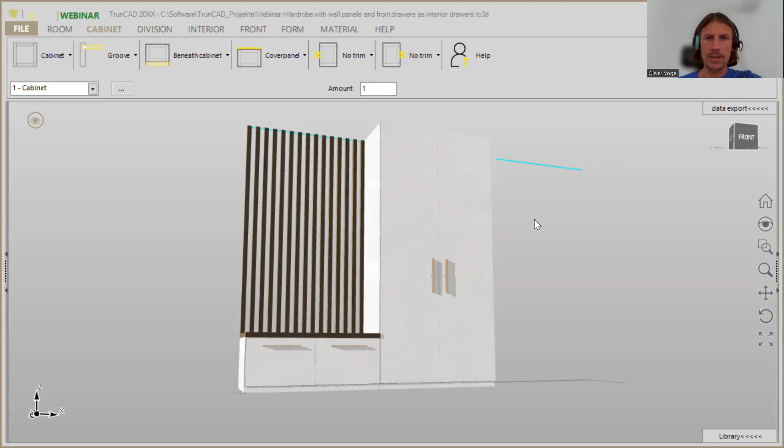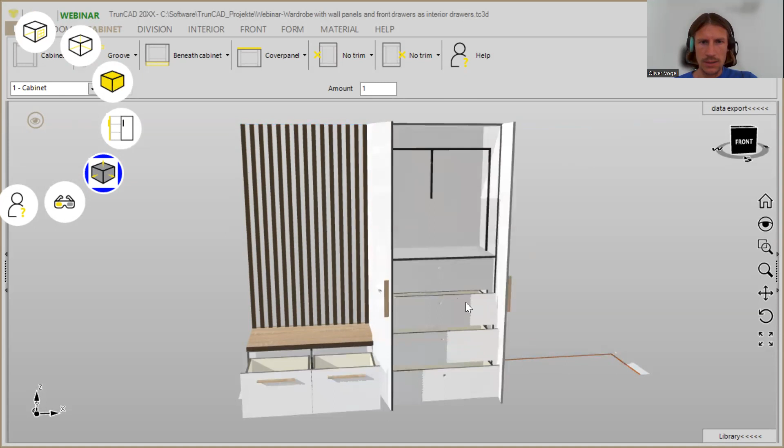Today you're going to see how we plan a wardrobe with wall panels and front drawers used as interior drawers, step by step. When I click here on the eye and open the doors, you can see that we have front drawers used as interior drawers. I will also show you what to consider and how to plan this in TrunCAD.

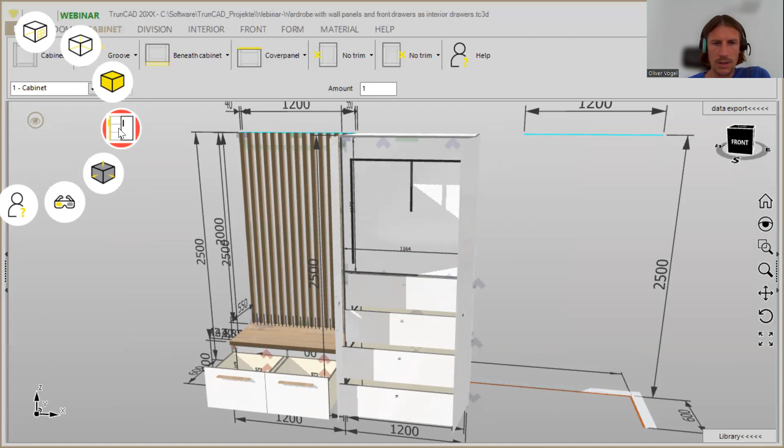All right, let's start. First of all, I will activate the smart clicks and make the doors visible, and when we click here again, they will be closed again.

So if there are any questions, just let me know in the chat, and let's start a new project. We click here on the File tab and create a new project.

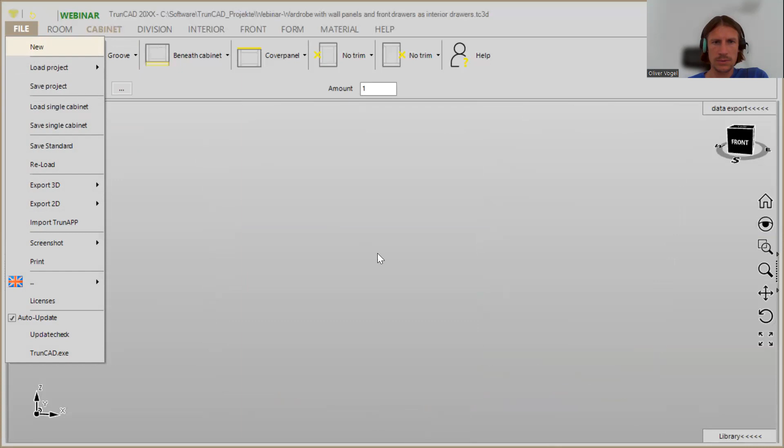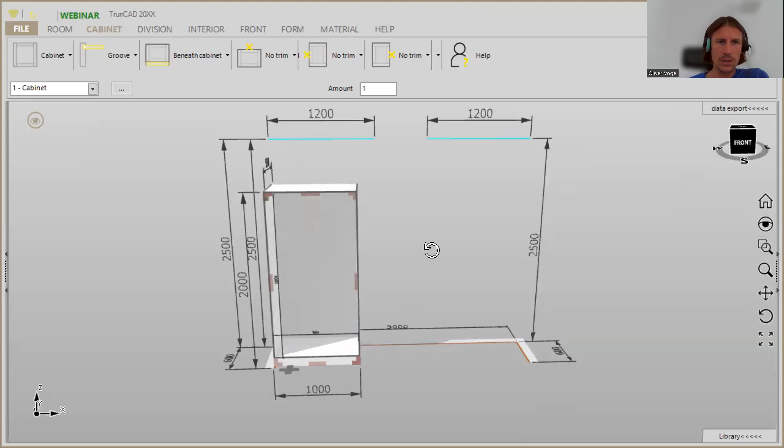So we start with a room. We can make this left side and right side a bit smaller. It's not so significant in this project. Here we change the height to 500, and here the width of our cabinet to 1200.

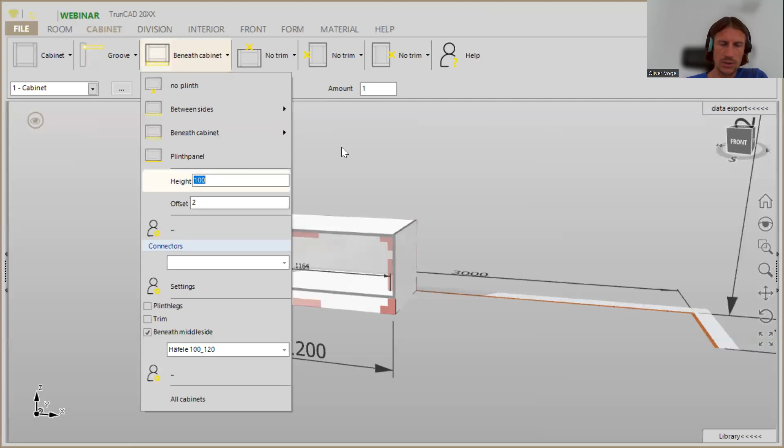So we click here on beneath cabinet and change the height to 80 millimeters. And we do have a cover panel on top, so we just activate it and we will have an overlap of 3 mil.

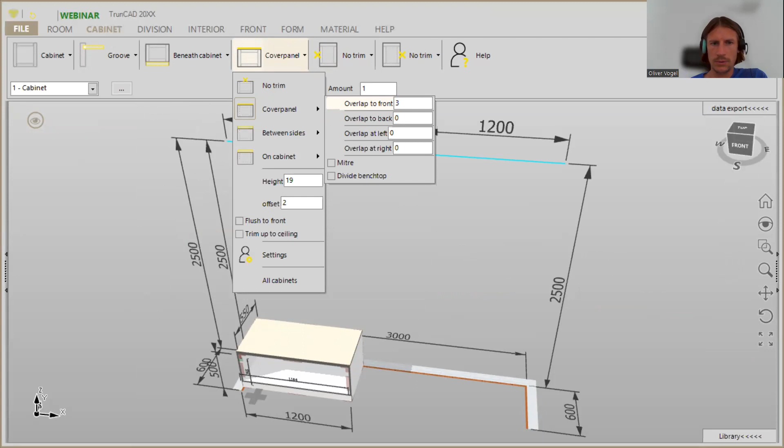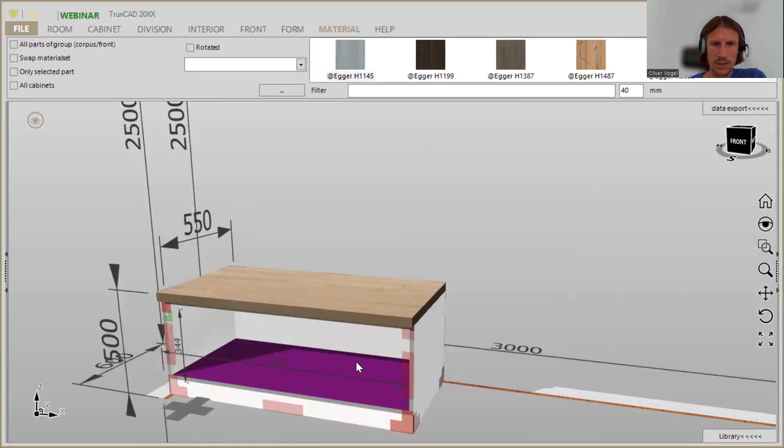Next we can go to the material tab and drag and drop a new material onto it, which is 40 millimeters thick, and then it's adapting.

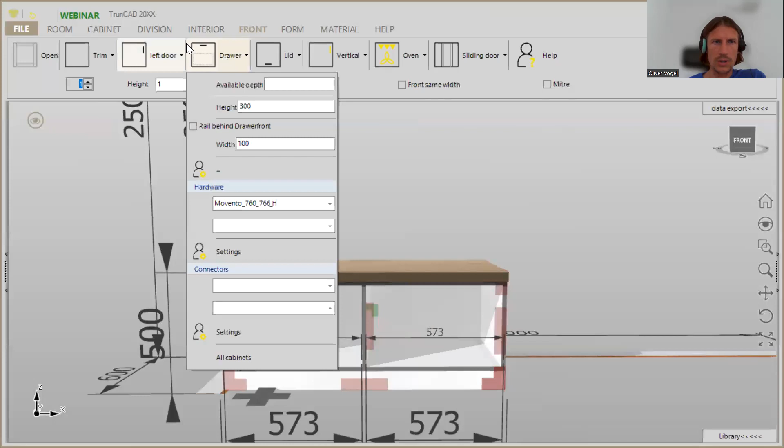All right, the next step is we click on the division tab and add a vertical, and then we click on the front tab and add two drawers, one on the left side and one on the other side.

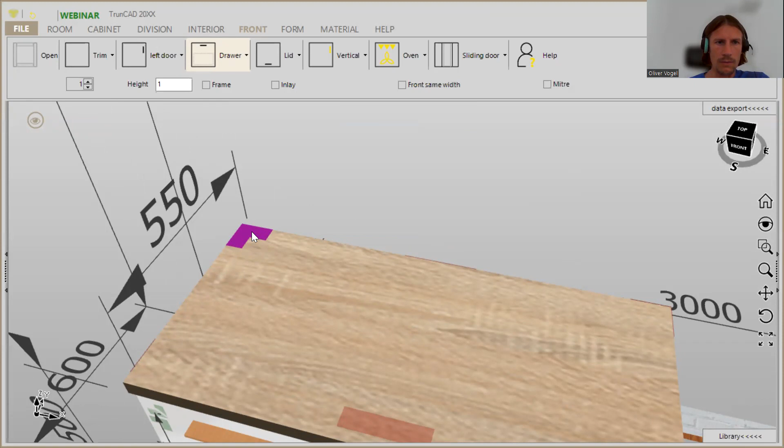So that is our first cabinet, and for the next one we want to have a cabinet on top of here, which will be our wall paneling. So we can click here and just add a new cabinet.

So that is our default cabinet. Now we want to have it here the same width as our bottom cabinet, and the height is okay.

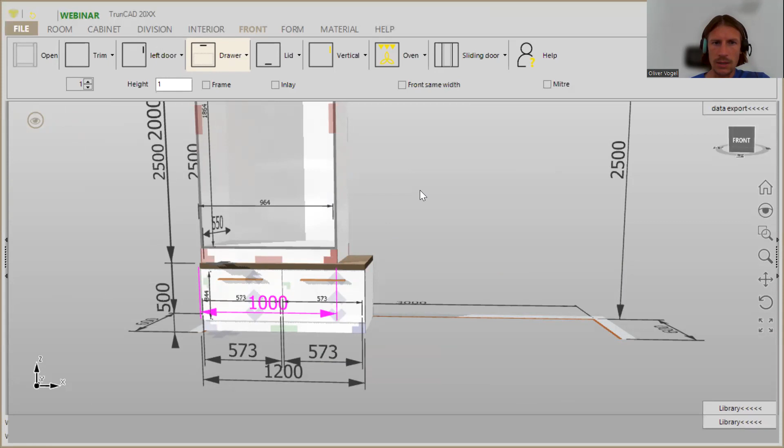And in this case, we are going back to the cabinet tab. We don't want to have a back, so we type in no back. And we don't want to have a plinth, that's why we click here on no plinth. Everything in the cabinet tab.

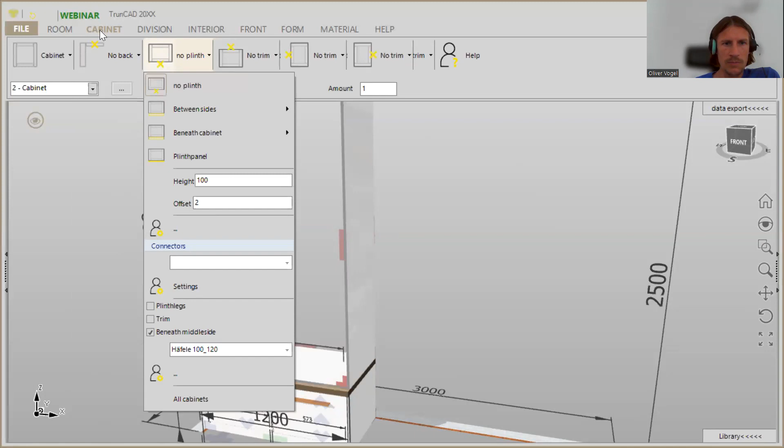So we will delete the top panel. Just click on the smart click and here we delete the top panel. And the same with the bottom panel - we click on the smart click and we will delete the bottom panel.

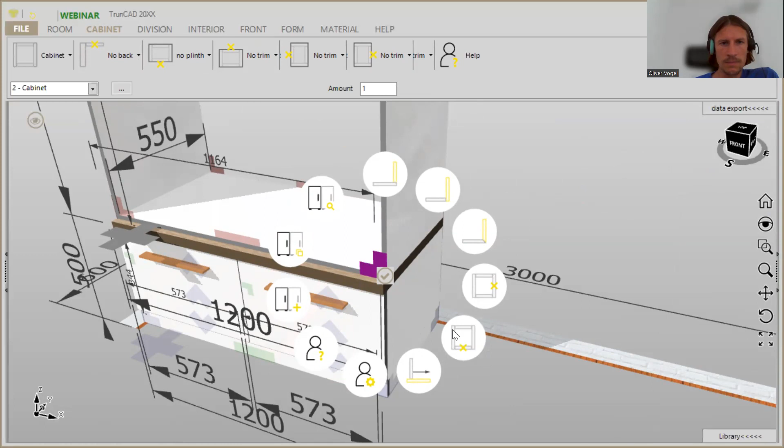Next step is we go here to the division tab, and here we can calculate how many verticals we want to have. Now when we have the sides 15 or 13 plus 2, we have 15.

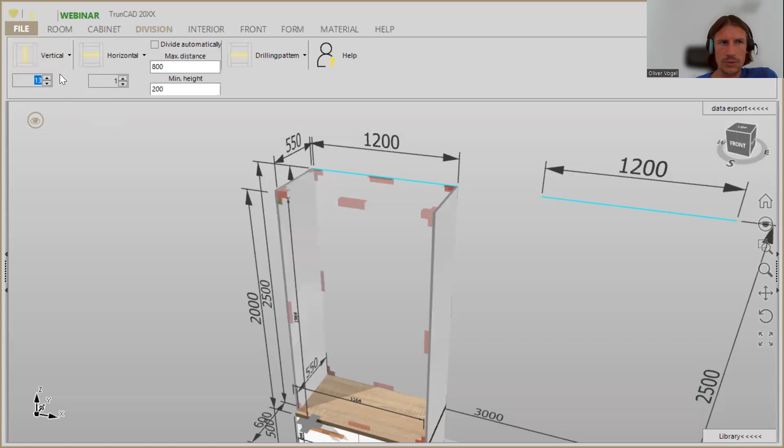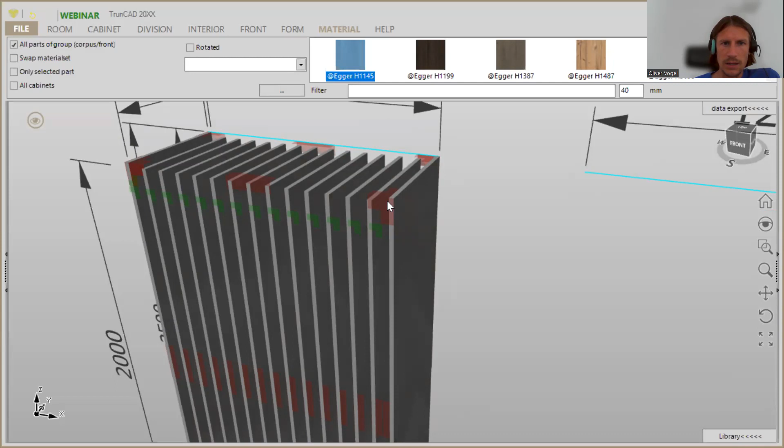We can drag and drop it in here, so we can also change the thickness. Now therefore we go to the Material tab, activate the checkbox 'all parts of a group', and then we just drag it and drop it over it, and the panels are getting thicker and the space in between is getting less.

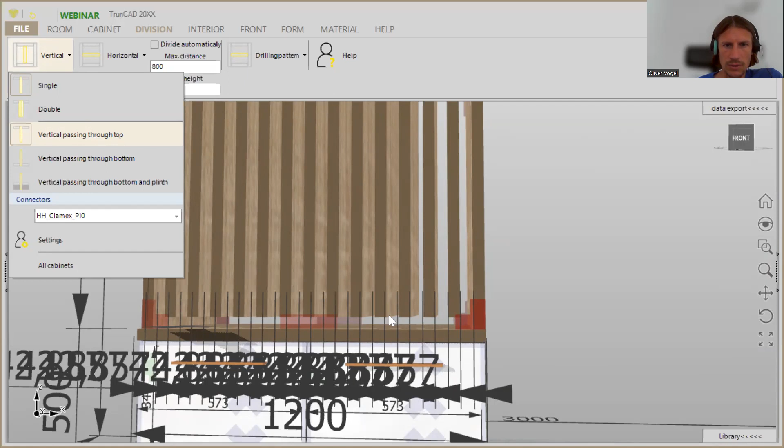So you see here the panelings don't go to the top, neither to the bottom. That's why we go back to the division tab and go to the menu of verticals, and we say vertical passing through top and through bottom. Then you will see they are also going to the bottom. Yeah, now they are going to the bottom.

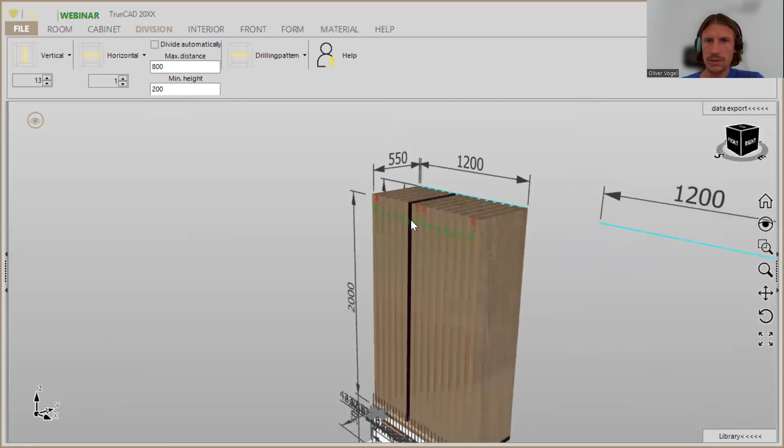So I click this button again. So, last but not least, we don't want to have such thick panels. That's why we click here on the depth of the cabinet and say we just want to have 40 millimeters, and then our panels have 40 millimeter thickness. Here you can also change it to 18 or whatever you want.

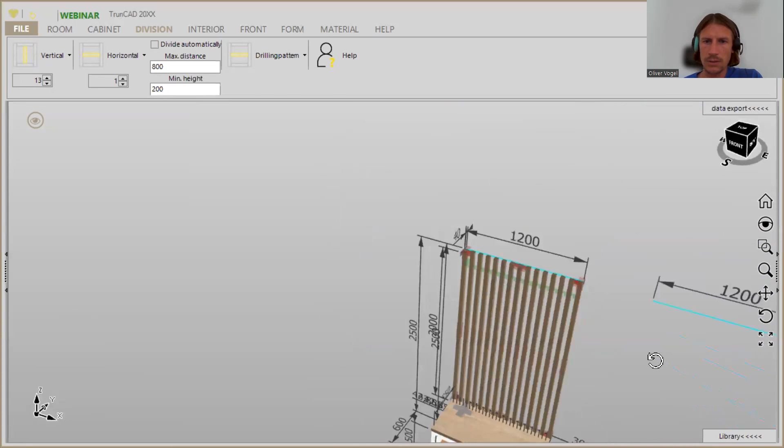So yeah, that is actually our second cabinet. And last but not least, we add our last cabinet. I just click here on the smart click, and here the width is also 1200 and height is 2500.

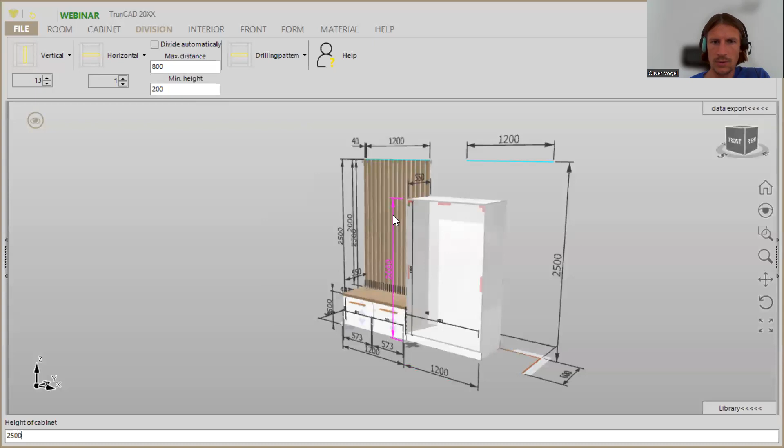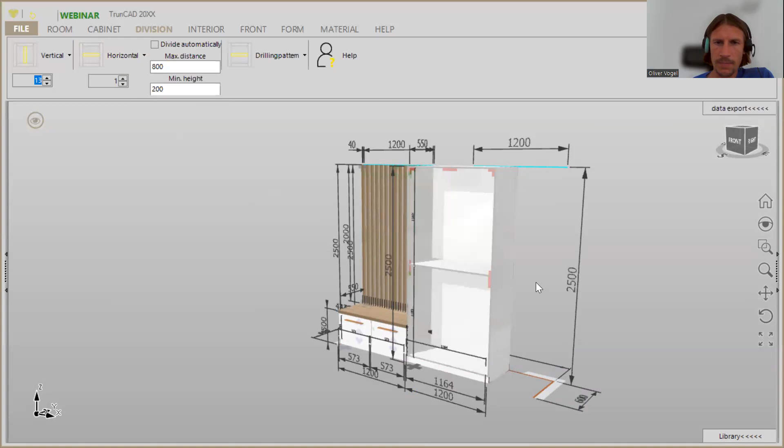So we are going to the cabinet tab. Beneath cabinet, we have also here a height of 80 millimeter. And then we are going on the division tab. We add here a horizontal, and here we add 2 verticals.

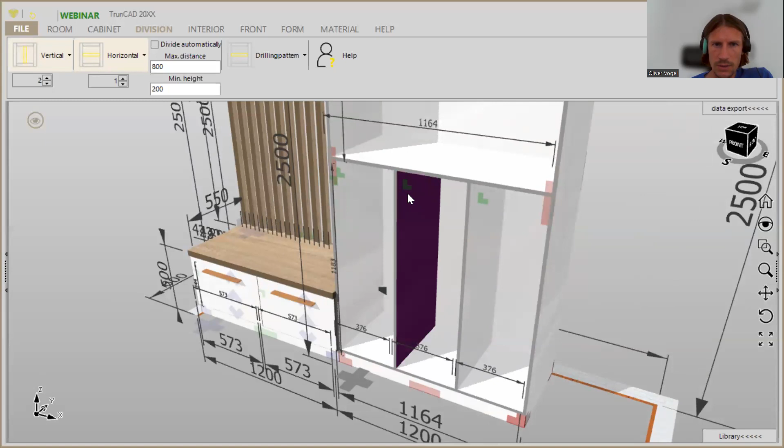Now I show you how to make actually interior drawers with front drawers. First of all, you see we have here 3 areas, and here the whole area, which is purple colored. Now the areas are getting purple colored when we are on a smart click. We click on here, and here you can say, okay,

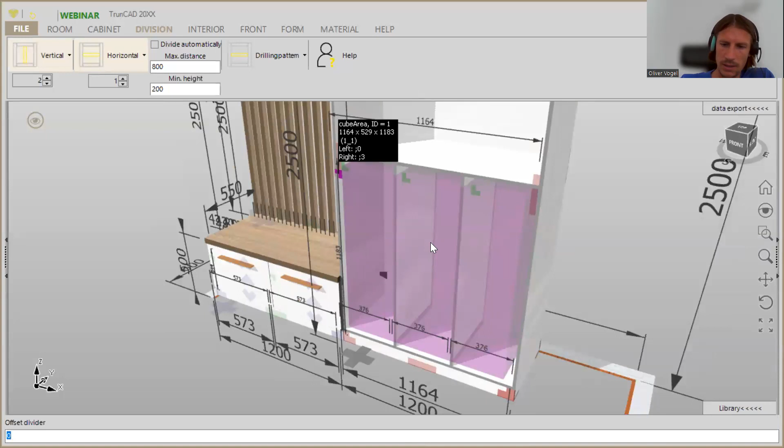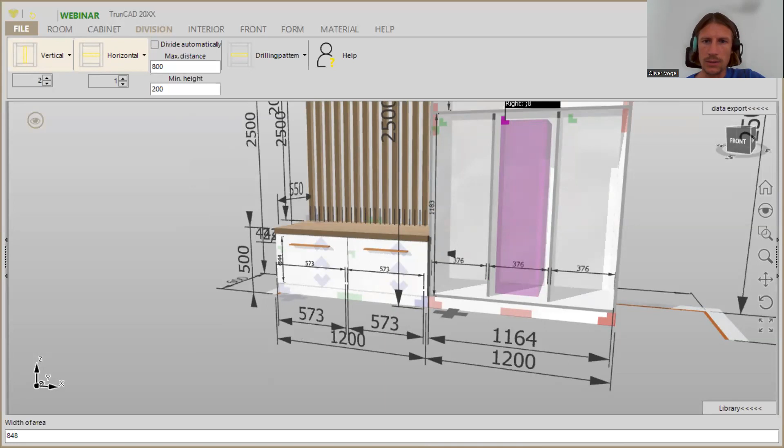offset divider, and here we say 60 millimeter, confirming it with enter. Now we have an offset of 60 millimeter, and you can click here on this smart click and change the width of the area to, first of all, I change it to 848. You can later on, I will show you why it's better to do this. You can change it afterwards again.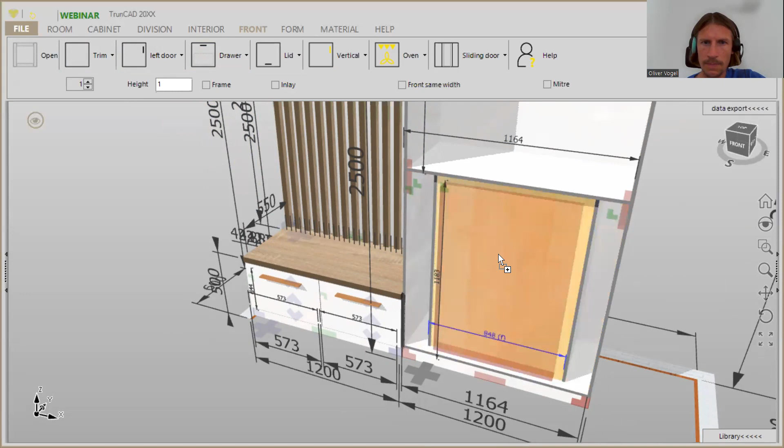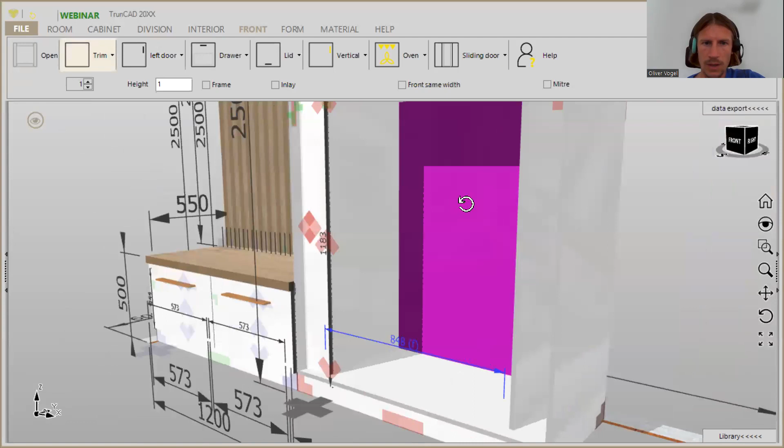So now we are going here to the front tab, and here you can drag and drop in the area front trim. And here you see you need to catch this area, and it's easier when it's a bit bigger. So then you can catch this, and for the right side as well.

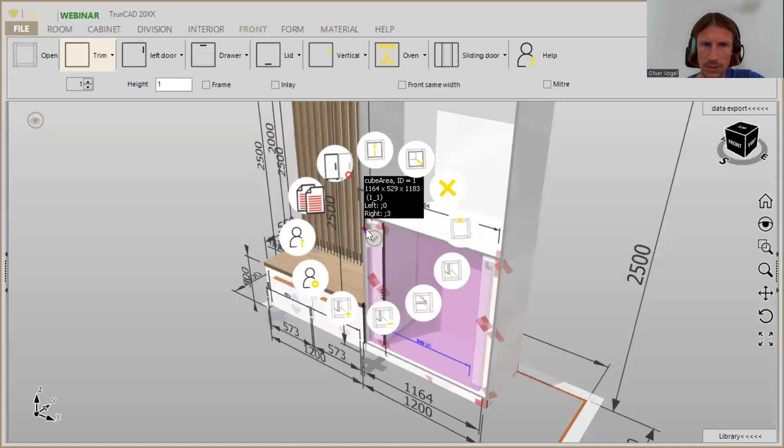Yeah, you still see you do have here an offset. You can, when you click on this area, define here the offset of the divider, however you want.

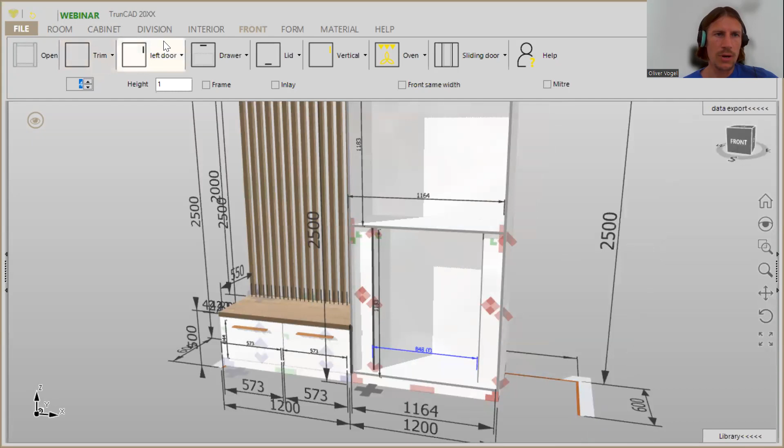So the next step will be that we click here how many drawers we want to have, and here we can choose the front drawers. Movento height shouldn't be higher than 200. And then you just drag it and drop it in here.

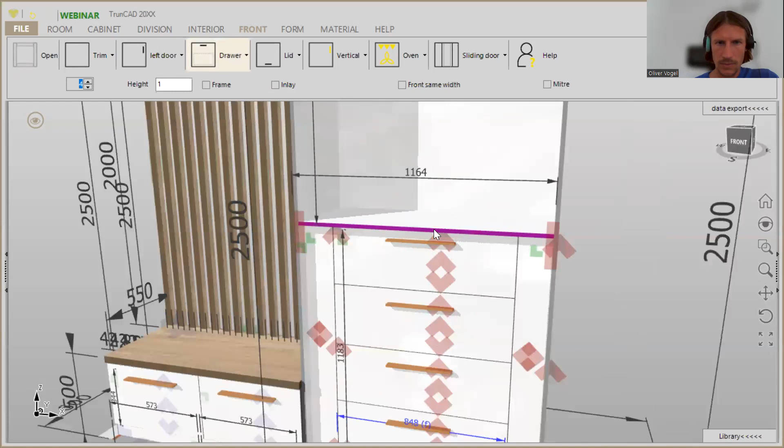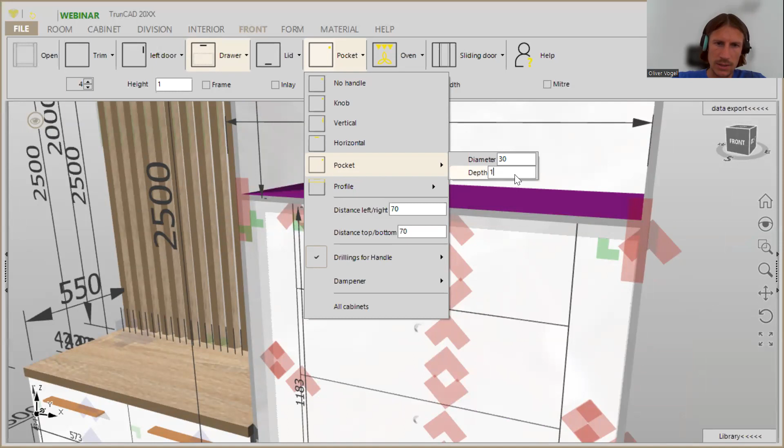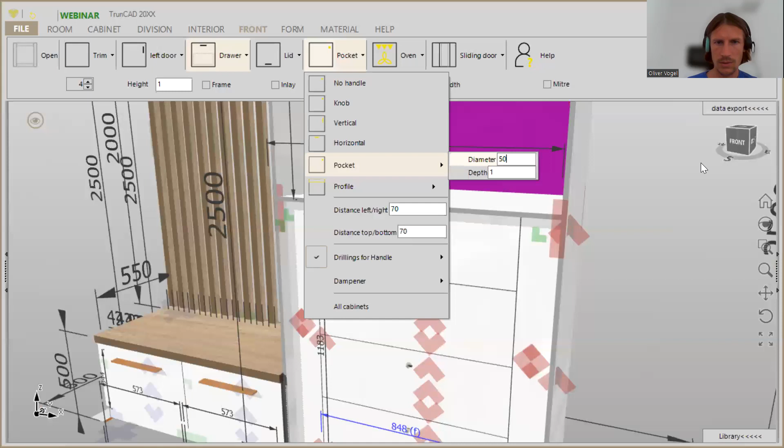If you don't want to have here a handle, you can also click on here and choose like a pocket. So my pockets just have a 1 millimeter, but when you type in here 0, then the hole is going through the whole material. Now you can also look through this. And here you can also define the diameter. I change it from 30 to 50, then it's a bit bigger.

Then in this case I show to you that you see here also the interior drawer.

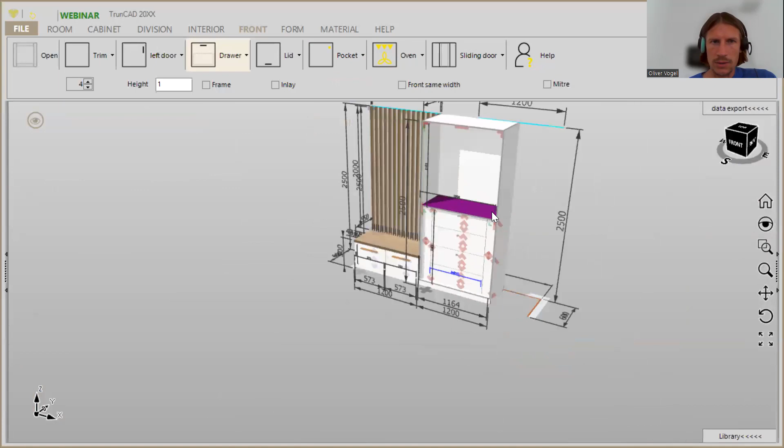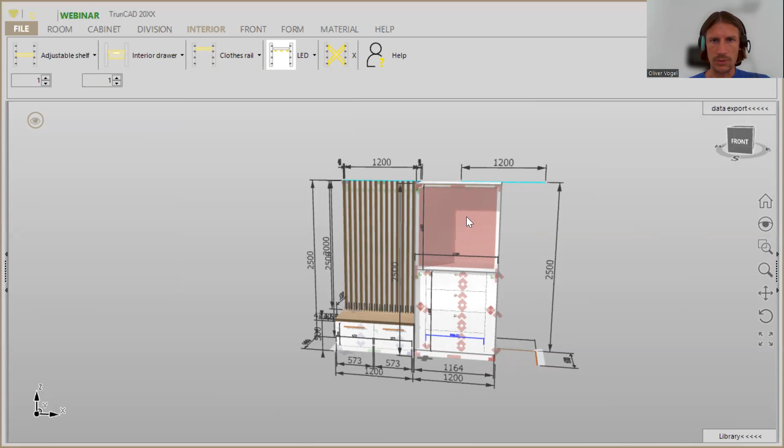Then we have done this, and next we are going up to the top area. We click here on the interior tab, and here you can add a clothes rail with a distance to a top of 150, and you just drag it and drop it in here, and it will be also displayed. I wanted to have a clothes lift.

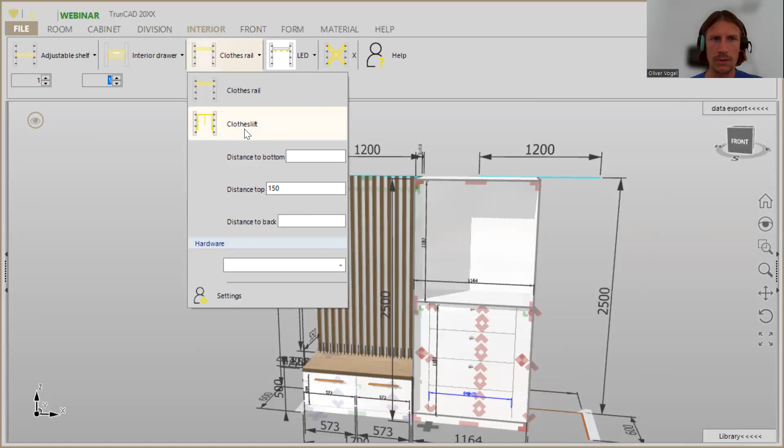So when you want to delete here something, you just type in 0, and then you drag and drop 0 in it, and that is like deleted. And now 1, and we choose here our clothes lift. And here we are.

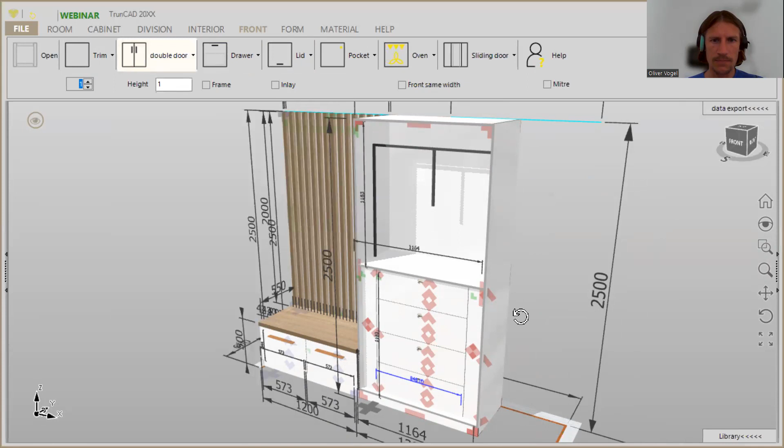So last but not least, we do want to have here a double door. That's why we type in here 1, choose here the double door. And now you need to consider here that we have more areas. You see it here in the preview when we drag it and are with the mouse over an area, we have here more areas.

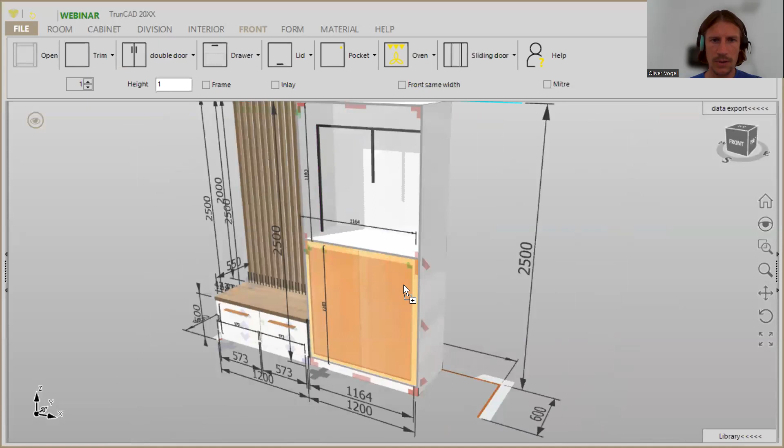So you need to consider that we drop it here on the divider, on the horizontal. Then you see in the preview it's going through the whole area.

So what you also see here in this drop-down menu, you can change the handles globally for this activated cabinet.

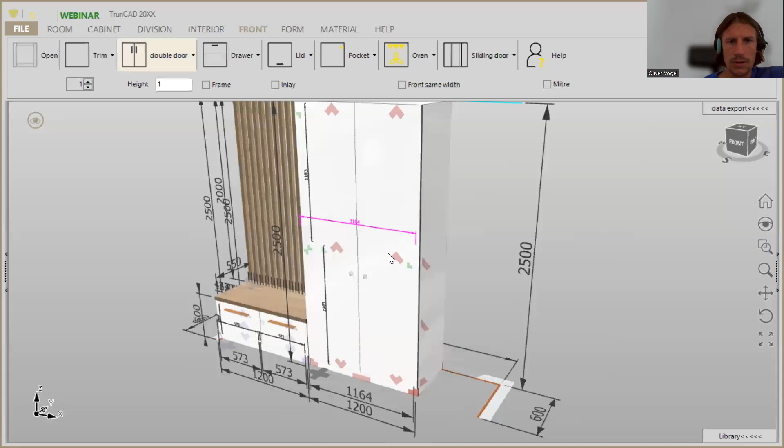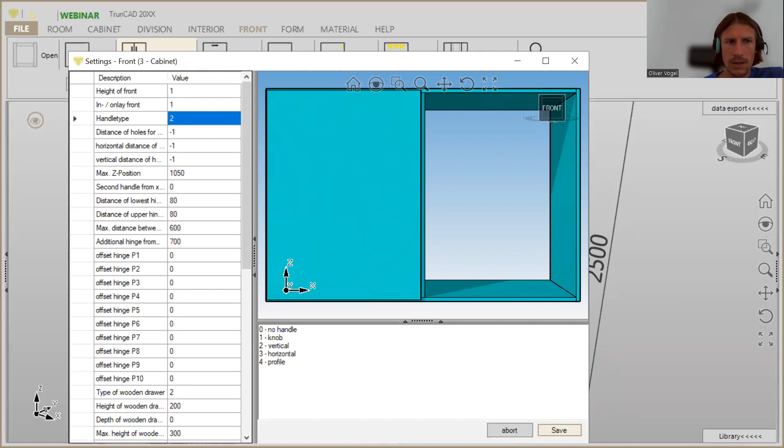When you want to keep the interior drawers like this, and you want to change the doors here, then you click on a right click for the door, and here you go on a setting menu, and here you click on handle type and type in number 2, that we have vertical handles, and then you have here the same handles as our first cabinet has.

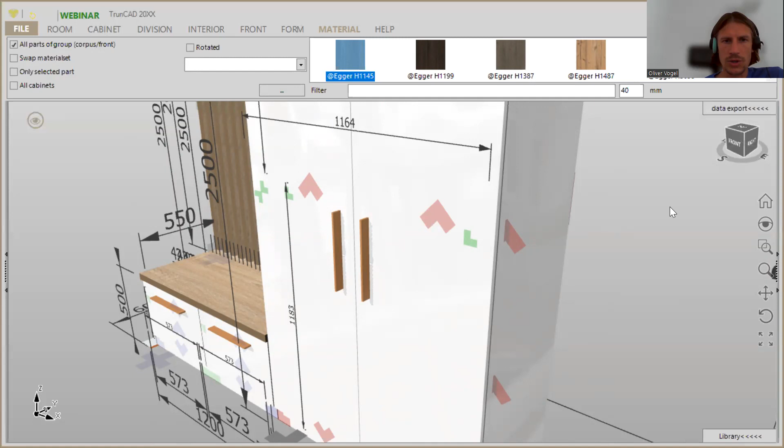When you want to click on here, you can change the material color, and here is it.

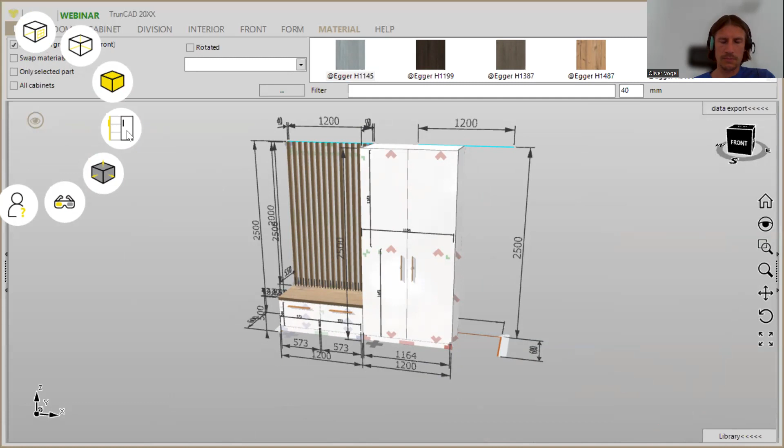And now you can also click here on the eye and draw this project with open fronts. Then you see we do have here the holes and here the handles.

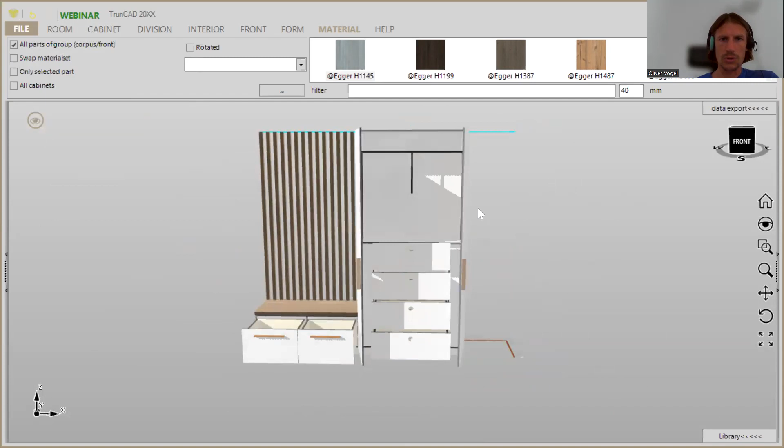And last but not least, you can here turn off all the smart clicks and present it to your customer.

And here, when you click on a top right corner data export, you will get your cutting list, which is calculating now. All right, this is it.